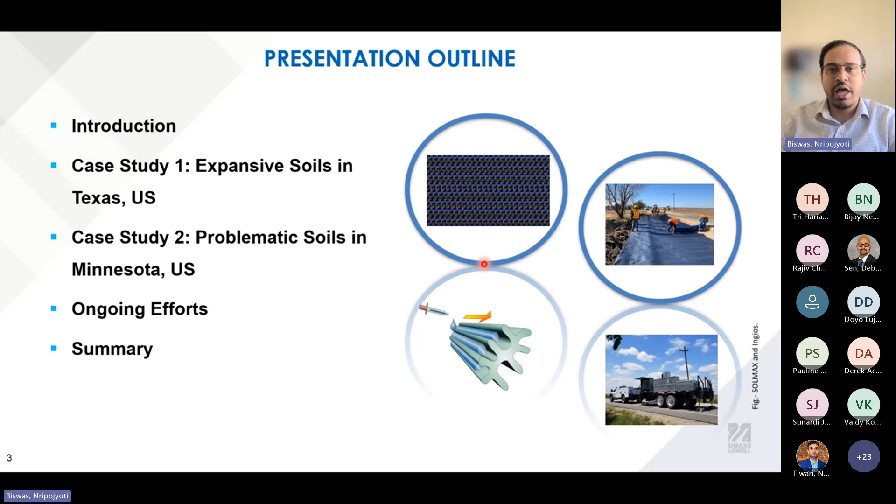So with that, this will be a short outline. I will just have a quick introduction, and then I will directly jump into two case studies. The first one is what we studied on use of these geotextiles in Texas, and the other one is how we used this geotextile in Minnesota. Both of these projects are related to pavement infrastructure because that was the principal focus. Then I will quickly show you some ongoing efforts, what we are still trying to do, and then I will conclude with some summary comments.

So to keep a quick background, a lot of this information is already available online, but I just wanted to introduce you. This Wicking Geotextile, anyone who has worked with geotextiles will understand the functions of geotextiles, essentially separation and reinforcement.

The principal advantage of this new wicking geotextile is that in addition to separation and reinforcement, it has a special fiber known as hydro or wicking fiber, which enhances lateral drainage. Traditional geotextiles also enhance drainage, but they mostly drain via gravitational flow. This geotextile, because of its microfibers, is able to facilitate flow by capillary suction.

This helps us use this geotextile for pavements, subgrades, or bases to remove more water, even when the suction is really low or really high, or essentially when it's more on the dry side of the optimum. Here you can see some of the schematics.

These are essentially 4DG, deep grooves, small grooves on the surface, and this helps to build the suction force to facilitate the capillary action. These are some other pictures, some of them from the website, so you can find a lot of those images there.

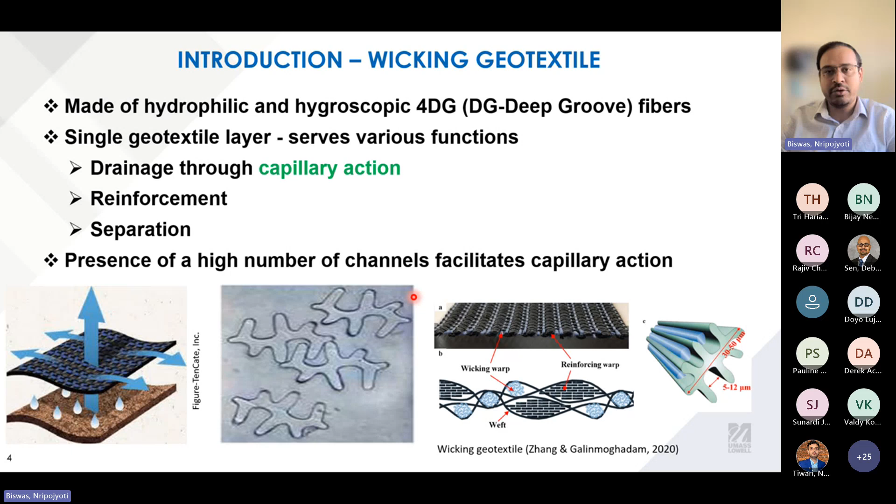With that, I will directly jump into my current focus, which is to show our efforts in Texas and Minnesota. The first one is our problems with expansive soils in Texas.

When we say Texas, the one principal problem we all talk about is expansive soils. The principal challenge in these soils, which causes pavement failure, is the swell and shrink behavior, resulting in differential heaving. Because of that behavior, it causes a lot of pavement damage, essentially cracking, rutting, and depression, affecting long-term pavement performance and increasing expenditure and maintenance cost.

These are some of the actual field images. On the right-hand side, this is one of the test sites, the region where our pavement test section was constructed. In this region, the pavements have lots of patchwork - this was a regular activity for the DOT to come and maintain the patches.

Because of this behavior of the soil - drying, cracking, and shrinking - there is constant damage to the pavement subgrade, which propagates to the top of the pavement. That's one of the challenges we wanted to address using this geotextile.

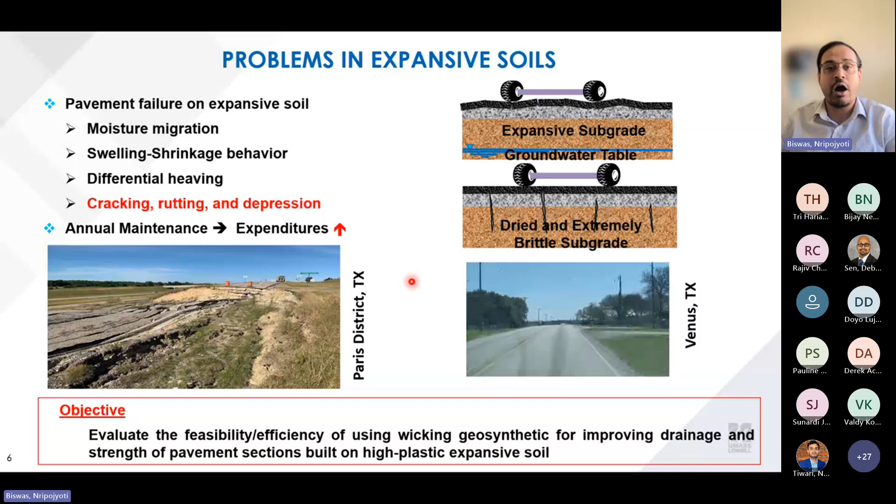So we started with a small laboratory test. These were very small tests where we just wanted to check whether this geotextile is able to drain the water. We did a control box as well as a reinforced box, then studied the drainability or transmissibility of the wicking geotextile.

We noted that in the absence of geotextiles, the volumetric moisture content is much higher. Once we put the geotextile in, the drainability or transmissibility increases, and in the given control condition, it can drain moisture in the lateral direction. That is something we are always trying to understand - whether it can drain moisture or not.

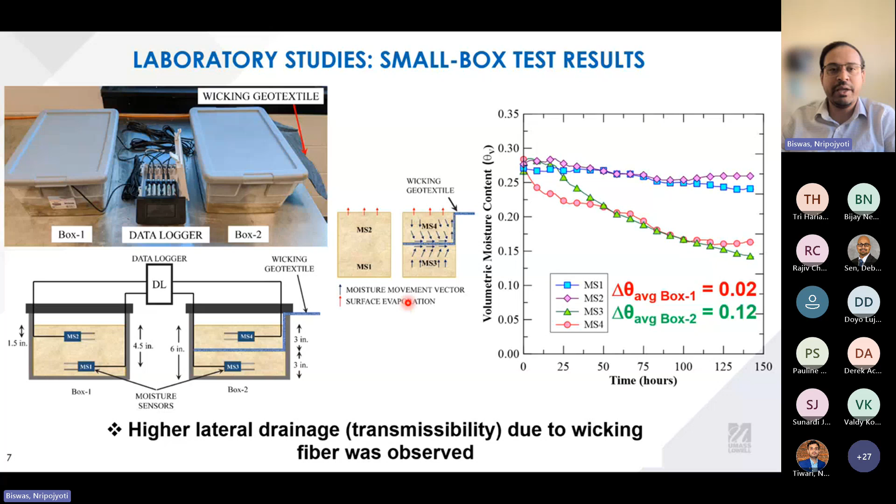After understanding this in a small scale laboratory test, we started to move into a bigger, large scale test. This was the large scale laboratory test that we did.

On the left-hand side, you can see this is a conceptual model, and on the right-hand side is the representation of the model that we did. It doesn't look exactly the same, but it had essentially the same function as what we initially assumed. So we created this box which had different sensors.

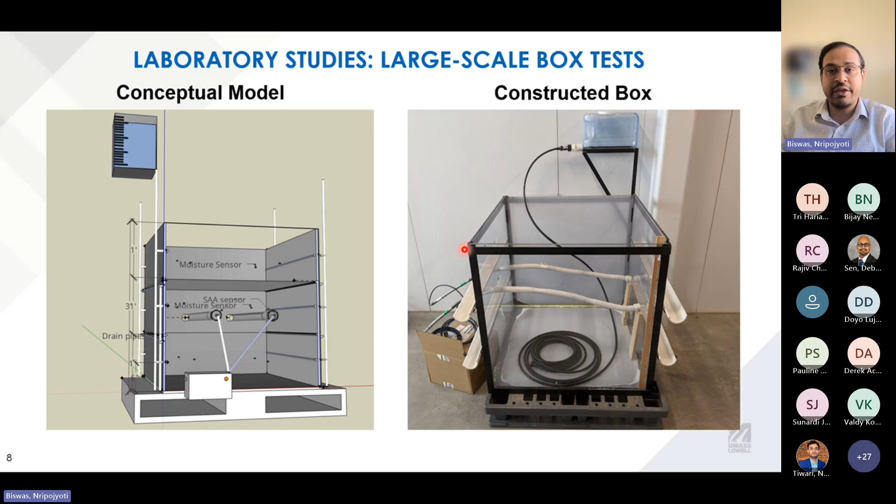Essentially, it has moisture sensors, shape and accelerometer or deformation sensors, and we can control the drainage in this box. This is the large scale test box that we did for understanding the behavior in a more controlled manner, and these are some of the steps.

So we constructed the box. We collected the soil from the local region, and we essentially constructed the box replicating the pavement sections. We had a subgrade of 18 inches, and then a base of approximately 15 inches or 12 inches. And then we constructed the pavement.

So we have different layers. You can see this is compacting the subgrade and then the layers, and then we have this sensor. These are just the locations where we install the sensors, and this is the final test box.

After constructing the sections, we also performed some quality checks. We use the dynamic cone penetrometer, which is Panda DCP, also known as variable energy DCP, to check the uniformity of the constructed sections.

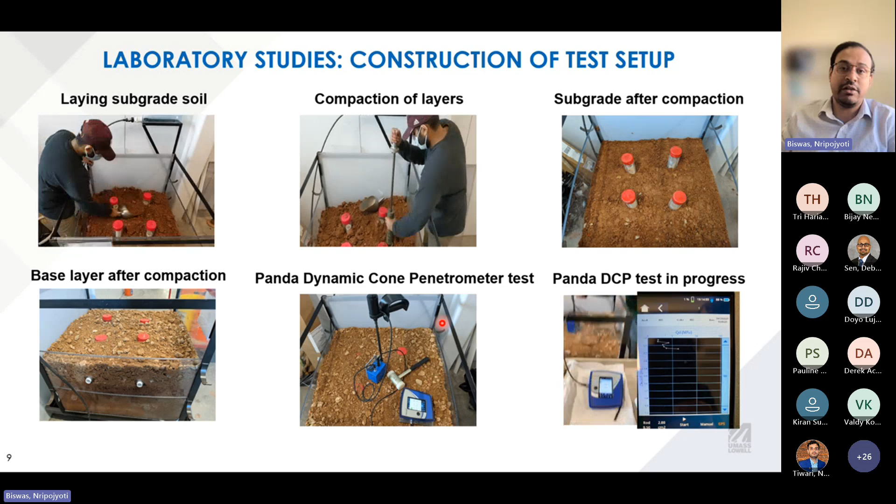For the reinforced section, we have to do this DCP test separately, once for the subgrade and once for the base, because the DCPs cannot penetrate through the geotextile, which would give wrong results. So that's what we did for the reinforced section.

This is just a representation of what we looked at or understood using this big box test. Again, just to see a result similar to the small test: the wicking fibers definitely helped in enhancing the drainage performance.

I didn't show the control test section results here, but it was able to drain more than the control sections. Another important thing we noted is that the base layer has higher drainage than the subgrade layer. The principal reason is that the geotextiles were essentially on the interface, and the drainage from the base layer is by both gravity as well as capillary suction.

Additionally, the grain size distribution of the base layers is much bigger than the wicking fiber. So the capillary suction generated in the wicking fibers is much higher than the pore size in the base materials, so it was able to drain the base material much more quickly compared to the subgrade.

In the subgrade layer, we saw it can drain up to 12 inches below the geotextile layer, which was substantial, because if you can drain the moisture until 12 inches below the subgrade, you are essentially increasing the stiffness of that layer.

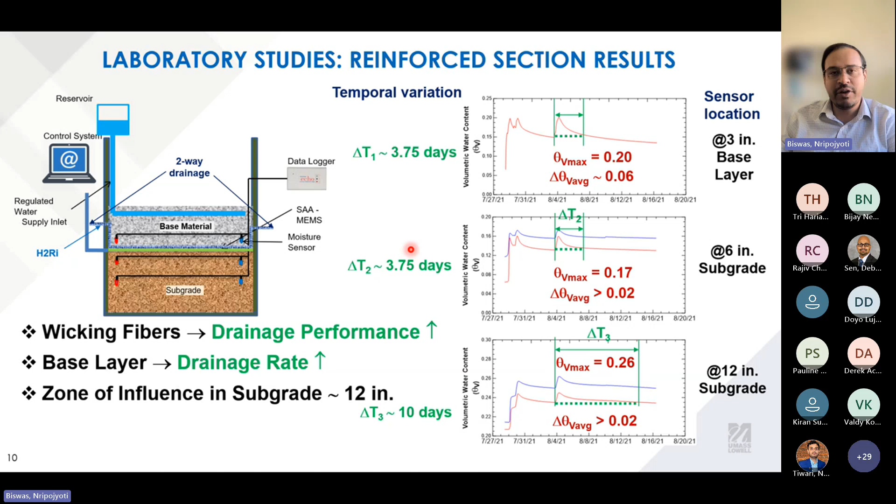Once we were confident that this works in the laboratory, we also parallelly constructed our field test section. So I will now go into what we did in the field. This is our field test and this is the project location.

This test section is located in Texas. On the left-hand side is a map clearly indicating the frequency of expansive soils in Texas, where the red regions are where you will encounter expansive soil everywhere. This is one of the principal challenges for the state DOT.

We selected one of those sites, Farm to Market Road 1807 in Central Texas, or Venus, Texas, and this is what you can see on the right. This was in 2017, when we were doing the reconnaissance of this region and how this pavement looks.

We decided with the DOT that we would use the eastbound lane as the test section, and the westbound lane would be used as the control section. The westbound lane has a different asphalt thickness, around 4 to 6 inches, but we decided to use thinner asphalt. After talking with the DOT, we thought that TxDOT has a huge pile of recycled material known as RAP, recycled asphalt pavement.

So anyone who is familiar with recycled material, recycled asphalt essentially obtained from the pavement surface, and the TxDOT Venus region, Johnson County, they had a large stockpile. So we thought we will use a marginal material as a base material, which is RAP, and we will use the geotextile, like H2Ri, to reinforce the RAP material. And at the same time, we will reduce the thickness of the asphalt layer. So we were trying to target multiple things through this test section.

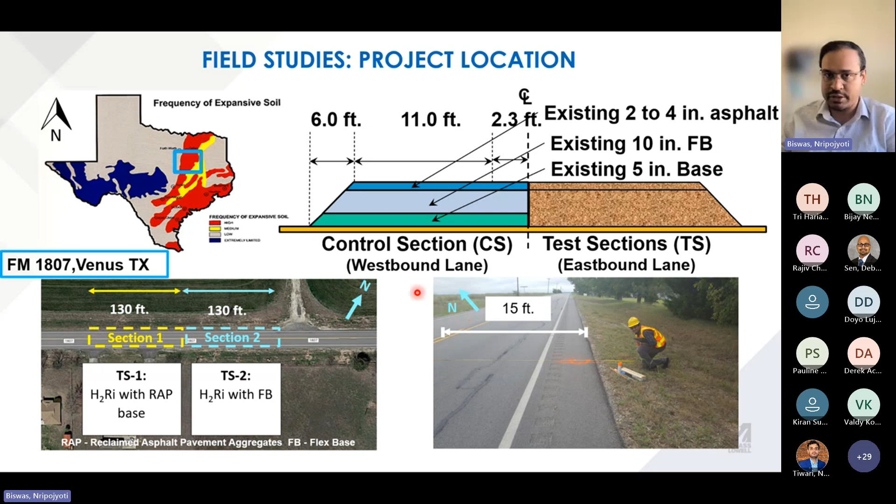And this is the outline, or the schematic of the test section. So this was what we initially thought we will do. We will have this base material, and on the left hand side you can see approximately 15 inches of RAP, or reclaimed asphalt pavement material base, and 2 inches of asphalt concrete. And we did install a number of sensors.

So we had SAA, shape array accelerometer sensors, which are the deformation sensors. And then we had earth pressure cells. And in this figure you are not able to see, but we were able to install at least 9 moisture sensors to monitor the moisture migration within the pavement layers.

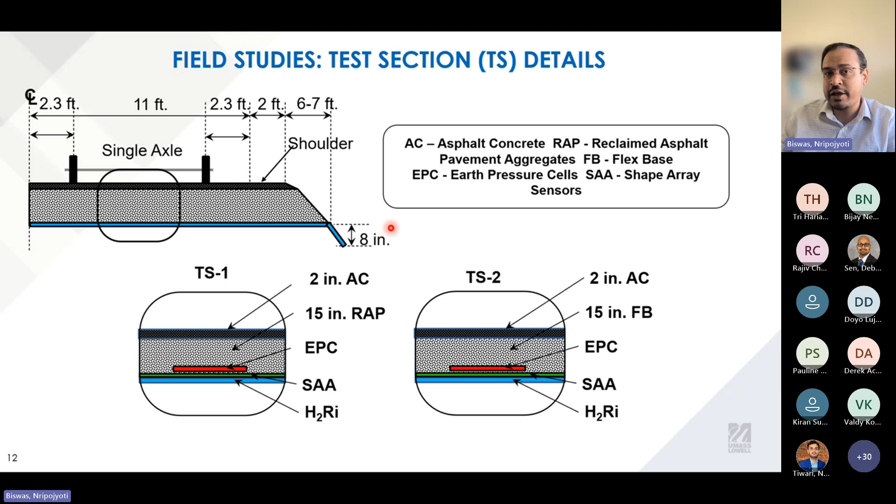One of the challenges with this wicking geotextile was we needed to ensure the geotextile was exposed to the surface, because that is how it will absorb, or create the capillary suction region. But during construction, it never happens what you plan. So during construction, we had to cover this exposed region with some RAP material, because TxDOT was concerned that if we leave it exposed, someone might damage the geotextile. So in the real construction, we had to cover these exposed regions with RAP material. But surprisingly, that didn't affect our performance a lot, and we still got the desirable behavior.

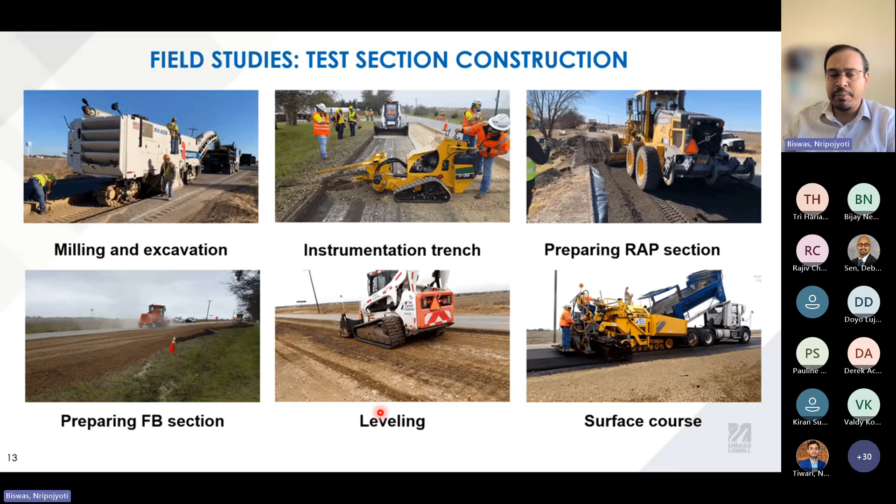And then this is some of the construction stages that we did. We had the initial milling and excavation, and then we did the instrumentation trenches for putting in the deformation sensors. Then this is the construction you can see on the right, the construction of the RAP sections and preparing of the flex base section. And then we leveled it. This final construction is basically done after 7 days. So for 7 days after this leveling, we left the pavement open for traffic, and then we came back and did the surface course.

After that, we also performed different performance monitoring studies. One study we did was the automated plate load test with the support of Ingios Geotechnics. This is a dynamic plate load test, very similar to the resilient modulus, the AASHTO T307 studies that we do in the laboratory, but on a larger scale. It's a little different from the FWD because it applies rapid load, or an increasing number of load cycles, and monitors the deformation. So this gives you the field resilient moduli, and we performed this study on this constructed test section.

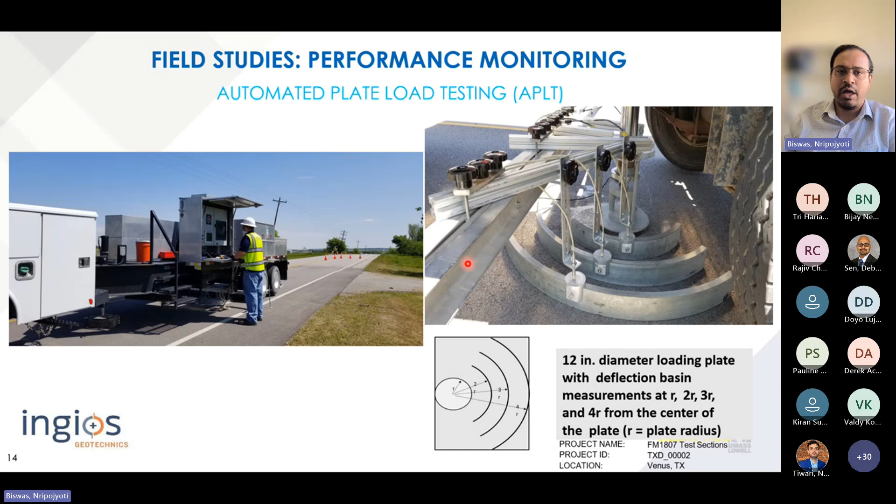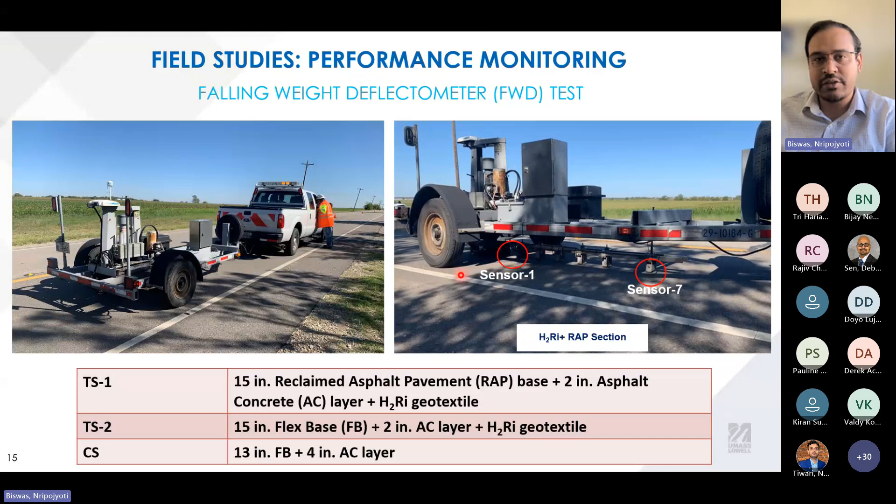We also did the traditional falling weight deflectometer test. This is just one test shown, but over the next 4 years we did falling weight deflectometer tests over different seasons to understand the behavior of the pavement layers at different times. You can see this has a weight hammer of 90 pounds, and 7 sensors that record the deformations. It essentially works on the principles of linear elastic theory, and helps us predict the performance of the surface layer, base layer, as well as the subgrade layer. So we were able to perform these tests for all the test as well as the control sections.

Now, to quickly give you some results that we have obtained in this work. So what we saw is like in the test section, which is the reinforced section with the wicking geotextile, you can see this bottom one, this is the green and the red one, those are the reinforced section, and the control section was the other side, which is having no geotextile.

We saw the moisture in the wicking geotextile was much lower, and it peaked at the period where there was rainfall, and it was able to drain the moisture rapidly after the rainfall, whereas in the control section it stayed persistently high.

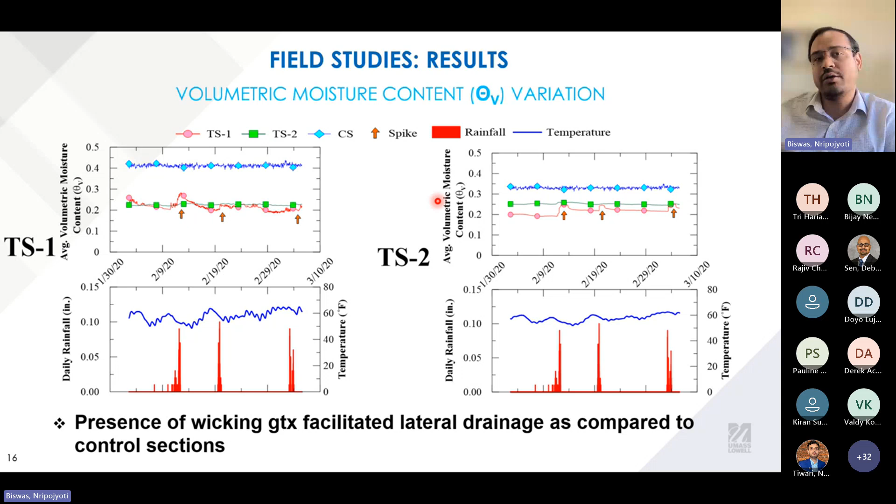Another thing we noted was the moisture in the RAP, reclaimed asphalt pavement layer section, was generally higher than the one in the flex base section. The reason is because the RAP materials have much finer particles as compared to the flex base, and because of those finer particles, the drainability of the RAP layers is much lower. So that was one of the reasons why this RAP material was retaining more moisture than the flex base material. But in general, both sections were retaining lower moisture as compared to the control section.

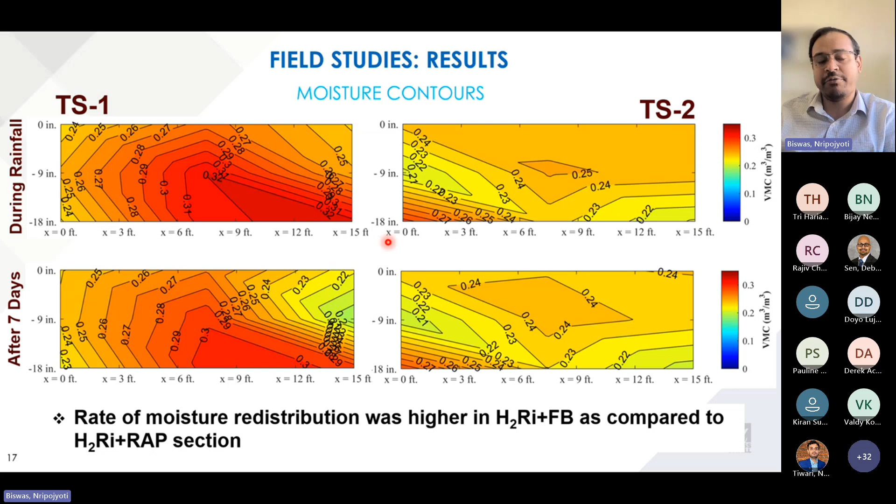This just represents the moisture contour. So we were able to see the moisture reduces near the edges, mostly in the wicking geotextile region, and that is essentially showing it is draining in the lateral direction, as we were expecting. We also plotted some of the moisture contours, and we are happy with the performance.

But once we went back and checked the various literature, we saw that the principal problem with RAP material is that it has lateral spreading, so it's not resistant to lateral spreading. But if you just test the resilient moduli for the RAP material, it has higher resilient moduli individually. Because of those asphalt particles sticking and holding the materials together, it generates higher MR. So that's why the RAP materials essentially generated higher resilient moduli as compared to the traditional flex base materials for this case also.

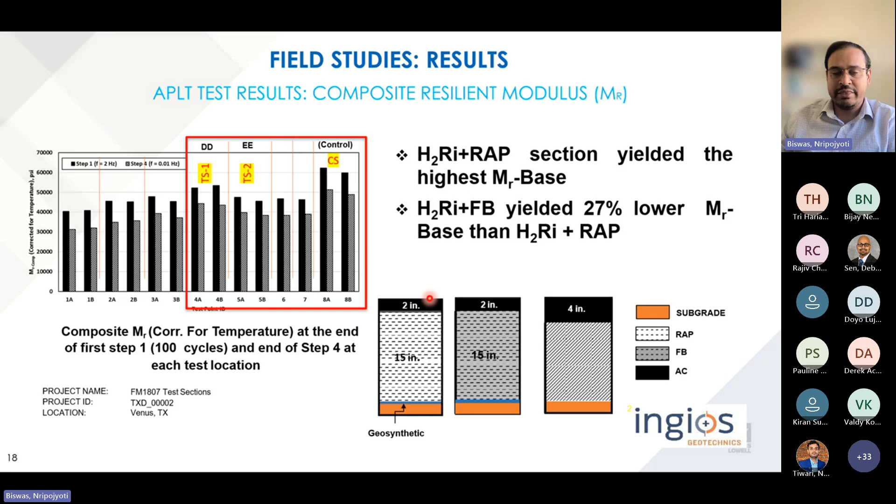And then quickly showing you what we saw as FWD test results. What we generated from this test was essentially back-calculated moduli and rut life. Again, this echoed the same behavior that we were seeing from the APLT. The RAP layer was showing higher rut life, or higher remaining life, and higher moduli value as compared to the traditional flex base.

From FWD, it is always difficult to exactly predict the subgrade modulus and the base modulus, but what we did was for the RAP material, we back-calculated the base moduli to be 45 KSI, whereas for test section 2, it was almost 25 KSI.

Interestingly, if you look at the control section, which has a thicker asphalt layer, the performance of the base and subgrade moduli was almost similar, which means the geotextiles along with the drainage were able to replicate the performance of a thicker asphalt pavement layer.

So this essentially helps us verify that if we are able to replace that thick asphalt with a base material of marginal quality, and then reinforce it with some kind of geosynthetic, then we can have a similar design life, or even better design life. So this was one of the major learnings that we understood from the studies in Texas.

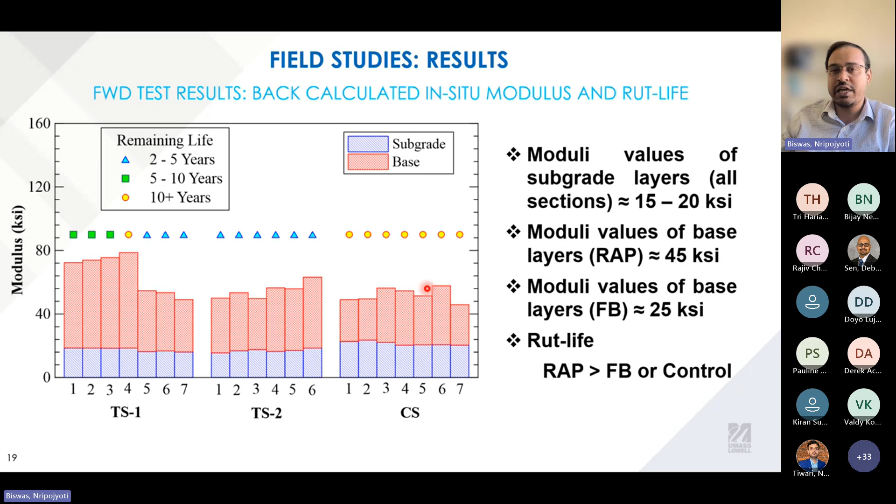So this is what we did in Texas, and once we were confident in this, we extended our work to a different region. We worked closely with Michigan State and Minnesota MnROAD, and tried to study the behavior of these wicking geotextiles in that region. Previously a few people had studied this work in Alaska, but the challenges in Minnesota were different because it's a different region than Alaska, and we tried to address that challenge through our study.

So this is the general background why we needed to do that work. If you see on the bottom, I will start here. So Minnesota is somewhere located here.

This region is in the wet freeze region, in the north of the American region. The challenges in the wet freeze region are that it can develop longitudinal frost cracks, and local regions of frost boils. Another challenge is that during the winter, water enters into the base and subgrade.

And the ice expands. In the spring, when the water thaws away, it is at its weakest, making the subgrade really weak. So that essentially damages the pavements in the spring region, or when the thaw is happening.

So our goal here was these three conditions which cause frost heave: freezing temperature, presence of frost susceptible soil, and water supply. Our goal was to cut down the water supply to the layers, or potentially remove the water supply, reduce the water supply, so that will essentially help in improving the pavement performance.

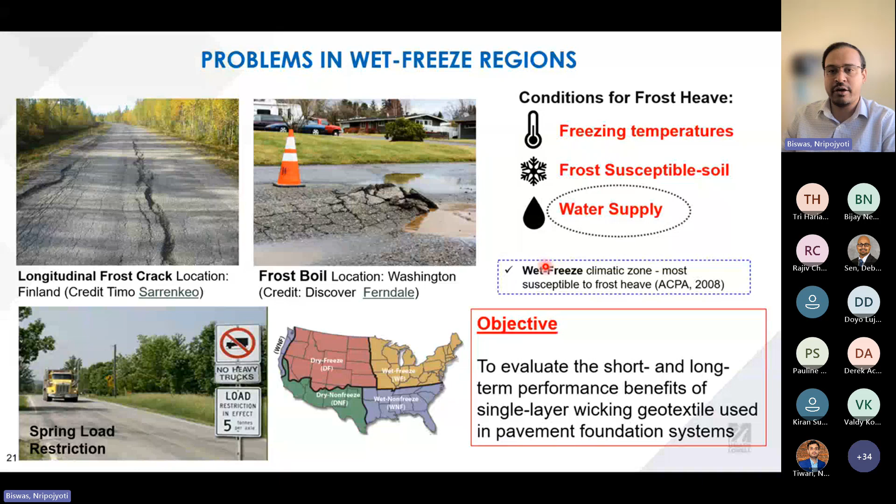So with that, we set up an objective to evaluate the short term and long term benefits of a wicking geotextile used in pavement foundation for this Minnesota region. Before going to the field, we did laboratory studies. In this, we did two types of laboratory studies: one was an accelerated laboratory loading test, and the other was the accelerated laboratory drainage test.

The loading test was performed with Michigan State University and Ingios in their laboratory. You can see this is the schematic of the test section constructed in laboratory. On the left-hand side, this is the control section, and on the right-hand side, this is the wicking geotextile section. Then this is the plan view.

These test boxes had different kinds of sensors: moisture sensors, thermocouples, and at the top there is a loading plate. This loading plate was used to replicate the field test, field repeated loading, or to calculate the stresses at different temperature, or when there is freezing happening in the base, subbase, or subgrade layer, and how this repeated load is going to affect the moduli.

You can see there are PVC pipes at the bottom, and some granular layer. The water was pushed from the PVC pipes from the bottom. In this particular study, we approached it through an open system. We ensured it is covered with some kind of foam board on every side so that freezing doesn't occur from the side.

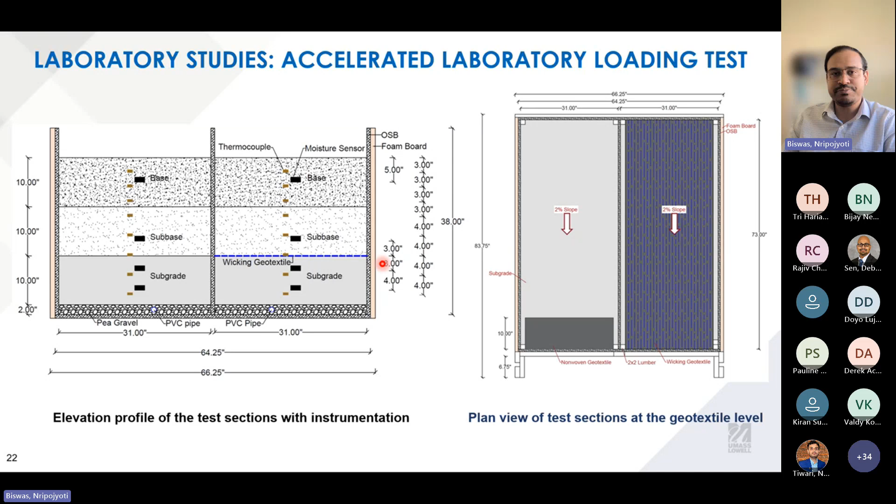This is the top view of the geotextiles: this is the control section, and this is the wicking geotextile section. These are the different steps of the construction. You can see the layers being compacted, then a 2% slope, and the installation of the geotextile and non-woven geotextile, and the control and the slope angle.

On the right hand side, you can see this is the final test setup. You can see the water tank, which is pushing water from the lower side. The water we were concerned with is moving only through capillary action. We are trying to insulate it from every direction using wood and foam boards. Here we have the small loading frame, and finally in the front you can see the two boxes. The wicking geotextile is extended into these boxes, which was used to collect the water that is coming in.

I think we also extended this to some kind of rainfall studies, but I have not included that in this presentation.

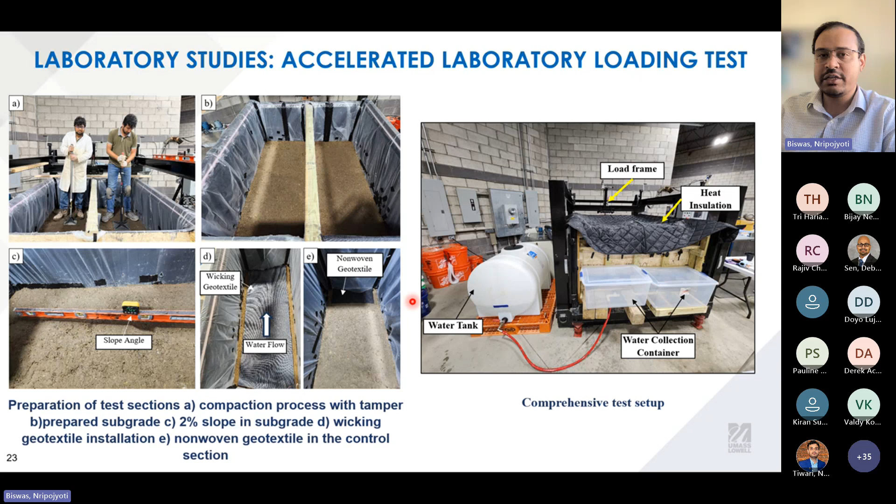But mostly, I just wanted to show how the freezing affected the performance.

The next study we did in the laboratory was again the accelerated laboratory drainage test, performed at Texas A&M. In this one, we again have two test sections: one for the control, and another for the reinforced section.

We again tried to insulate this section with geofoams on all sides because we wanted to ensure top-down freezing. The advantage we had was a big environmental chamber that we could set at minus 18 degrees Celsius, and we could push this entire box into it. This is approximately a 3 feet by 3 feet box constructed using three layers: subgrade, subbase, and base layers. We had a water supply, and we were able to push this entire setup into that environmental chamber.

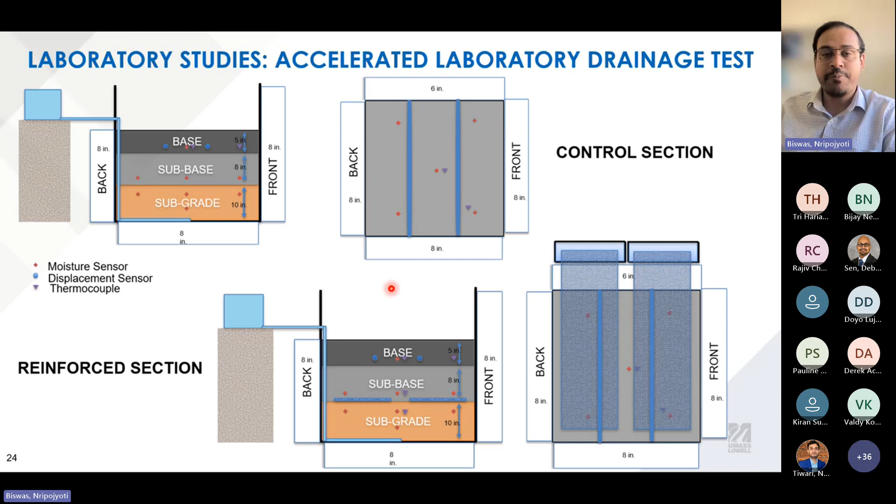This is again for the control. And on the reinforced side, you can see we have two reinforcement strips, and we are able to collect the moisture coming out from the reinforced section or the geotextiles in a separate container. This shows the different steps of construction.

We had different sensors installed in this box as well, like deformation sensors, shape array sensors, moisture sensors, and thermocouples. On the right hand side, these are the two final test setups. The top one is the control section without geotextile, and the bottom one is the one with geotextile.

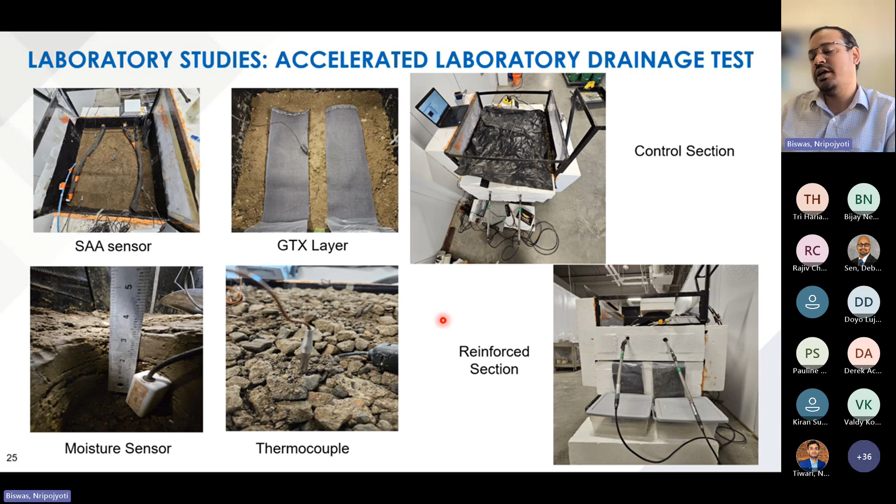This is a 3 feet by 3 feet box. If you can see the small white structures on the left hand side, those are actually the big environmental chambers, and we were able to push this entire test setup into an environmental chamber to understand the drainage behavior during freezing or thawing. So these are the two laboratory tests that we did for this new region study.

I just wanted to quickly show you some results, but there are a lot more results. I just wanted to highlight the main ones.

The first one, on the left hand side, is about moisture in the subgrade, from the accelerated loading test performed with the help of Ingios and Michigan State. We saw that compared to the wicking section, the control section or subgrade had higher moisture, mostly during thawing, because in the open system during freezing, the ice lenses expand and create more voids.

Since we are continuously supplying water even during the test, that pushes more water into the system, causing more drainage of water during thawing. In the case of wicking geotextile, that material is able to drain excess water even during the freezing period, so it didn't show as much increase in water content compared to the control subgrade.

Another interesting thing we saw is that in the case of the wicking geotextile, freezing happened more quickly compared to the control. The principal reason we understand is that there are some interface gaps or interface layers, and freezing was happening through that. So the frost penetration in the wicking geotextile sections was much higher compared to the control section.

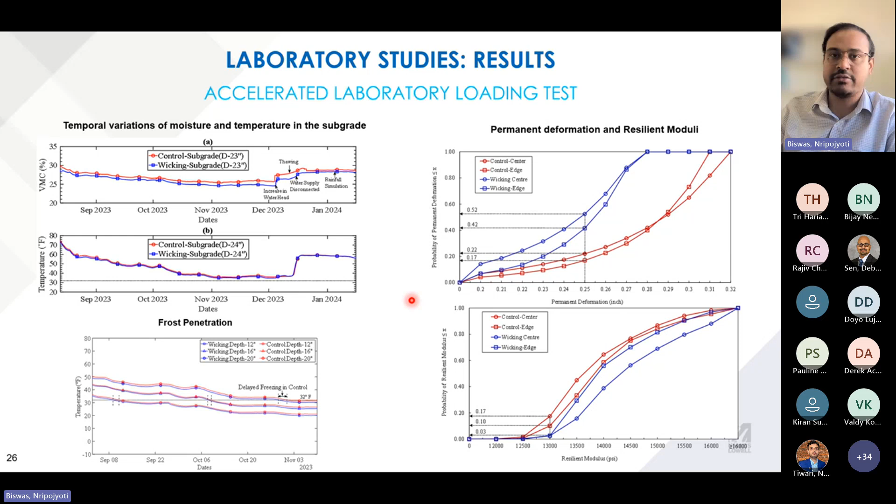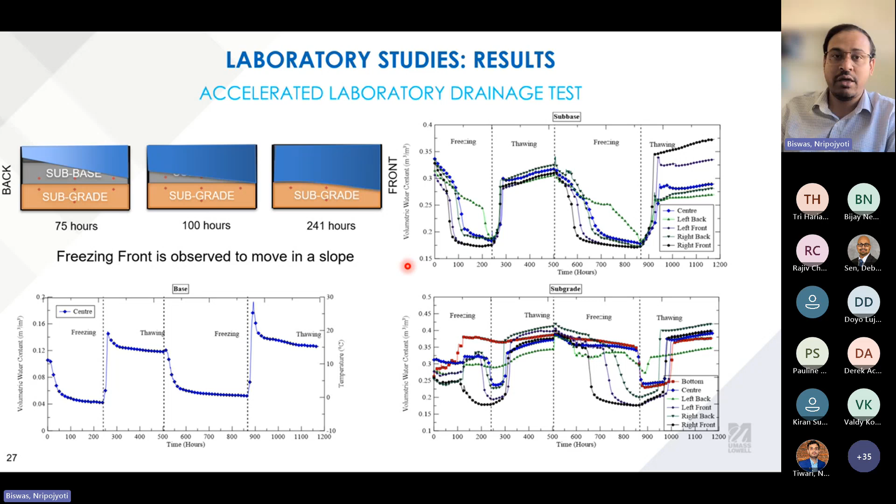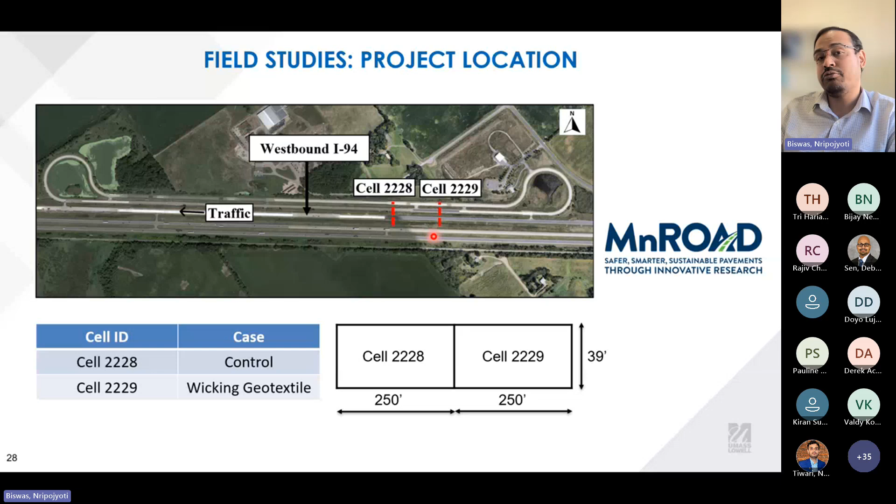Parallelly, since we were thinking of going to actual field studies, this project did have a field study. It was performed in Minnesota with the help of MnROAD, and it was constructed on westbound I-94. They have different test cells; our test cell was cell 2228 and 2229, on a westbound lane, constructed in 2022. So we have one control section and one reinforced section there.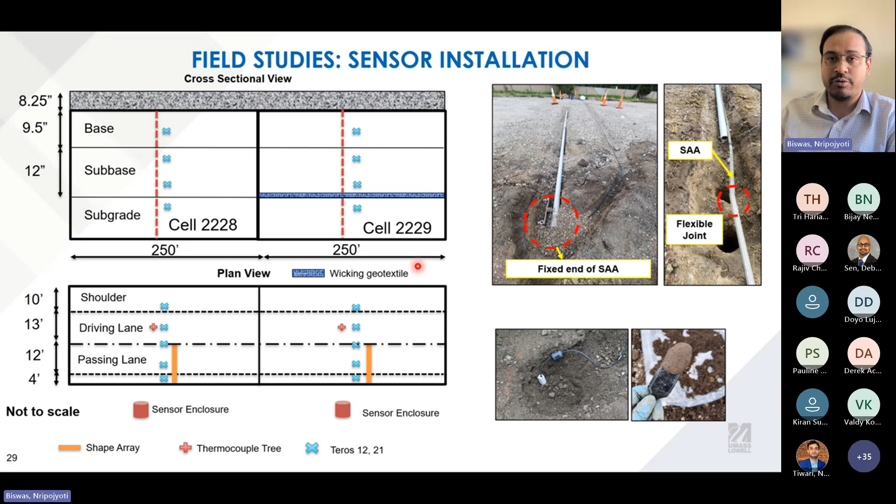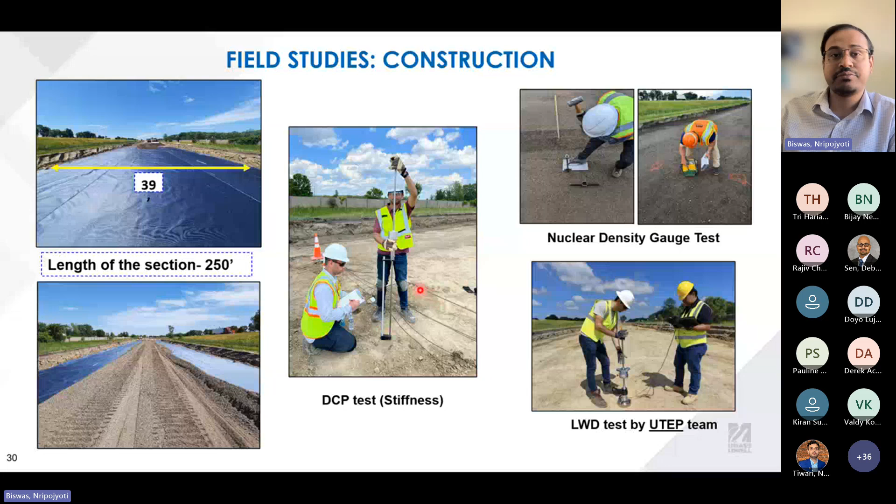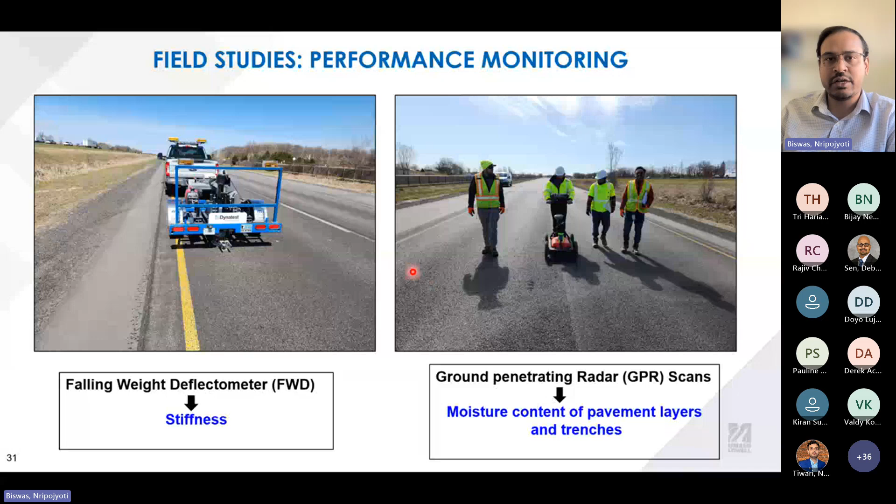By that, we ensured this geotextile is not exposed, and it also ensures performance. We also did multiple control tests, like the DCP test and nuclear density gauges, and we were able to perform LWD tests with the help of University of Texas at El Paso. We are also doing ongoing work, essentially falling weight deflectometer as well as GPR scans. This is still an active project, and we are still getting results and trying to analyze this performance.

Just to give a quick overview of the results, this is the results from the moisture content. I will just focus on the subbase moisture content as of now. What we see is that in the control section, the drainage was slower compared to the reinforced section. In the wicking geotextile section, the drainage was quite rapid, because that's one of the advantages of the wicking geotextile. In this one I have not shown it, because this is a bit of an old result, but in general, during construction of the control section there was no rainfall, whereas during construction of the reinforced section there was rainfall.

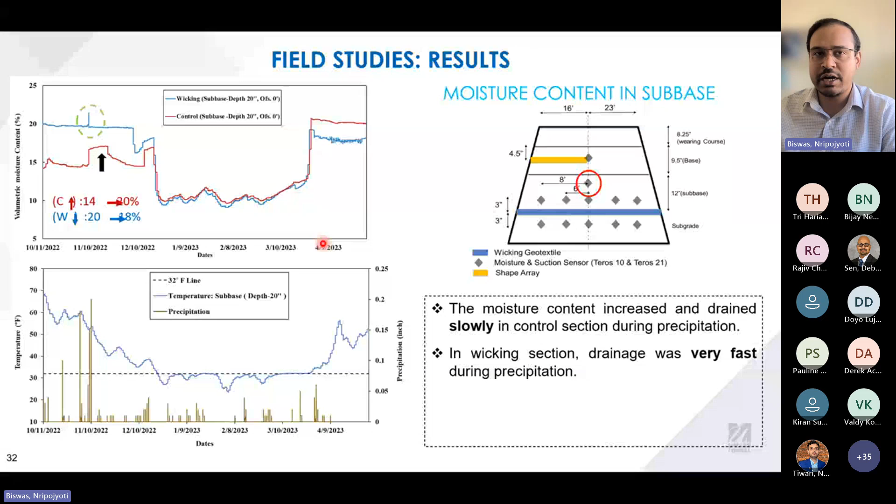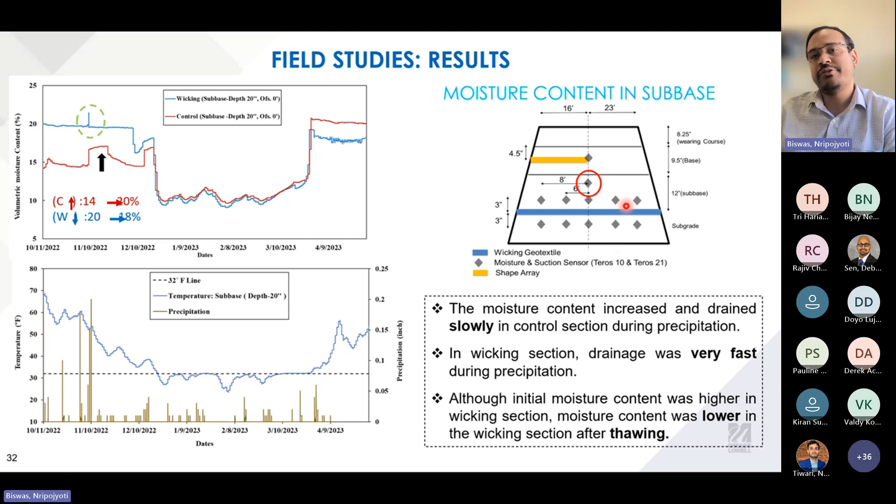That's why the subbase was already at higher moisture content for the wicking geotextile, which is evident here. Over the longer period, because of the geotextile, the subbase moisture is continuously going down. The wicking geotextile is continuously draining the moisture, and it has now gone down below the base, below the control section. That's definitely one of the advantages we're seeing because of the geotextile. This is just one representative sample, but it's a general trend for both the center and the edge of the pavements.

Now some analysis from the matric potential of the suction sensors. One thing we noted is the matric potential jumped during sub-freezing conditions. As freezing started, the temperature went down, the material or the subbase froze, and the capillary suction went significantly high. That resulted in a maximum increase of the matric potential.

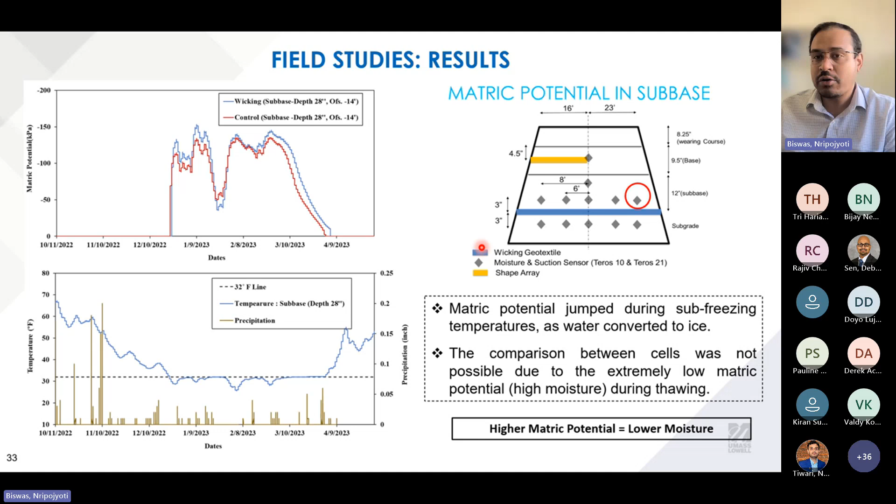During the thawing period, the comparison was difficult because everything doesn't go as planned in field construction. The comparison between the cells was not possible because the matric potential sensor was not recording data during the thawing season, since it was really saturated and the potential sensor stopped recording. But during the freezing season, it really showed the formation of ice, or the beginning of ice formation, and how it performed.

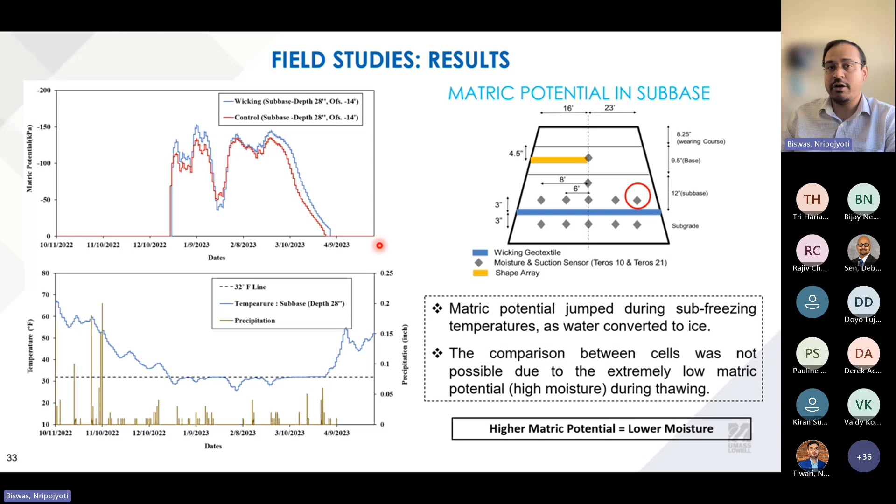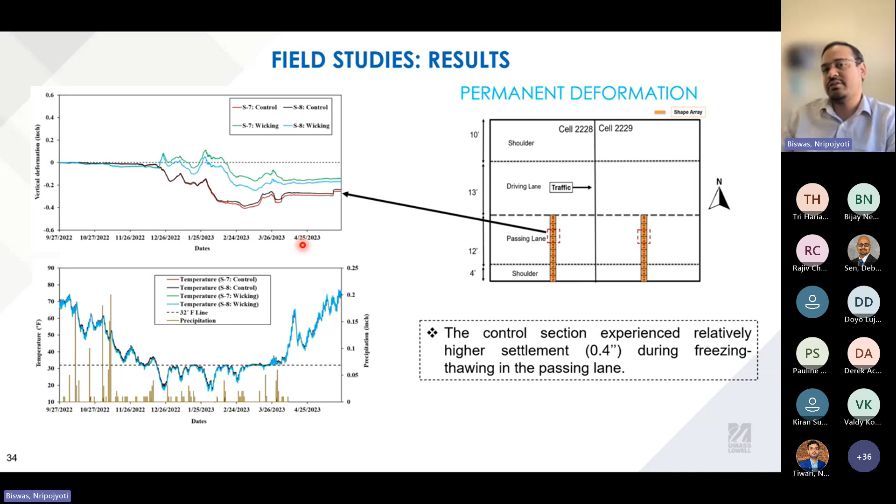Finally, the permanent deformation using the shape array. In this one, we wanted to show the deformation below the pavement, in the wheel path. As compared to the control section, which has much higher deformation, compared to the test section or reinforced section. This shows, both from the reinforcement action as well as the drainage action, the reinforced sections have much better performance compared to the control section.

With that, I'll quickly show some ongoing efforts, because we're still learning a lot on this. What we're trying to do right now is see how this geotextile is effective on slopes. This work is ongoing by one of my colleagues, Avinash, who is working on this right now, and I appreciate him sharing this information.

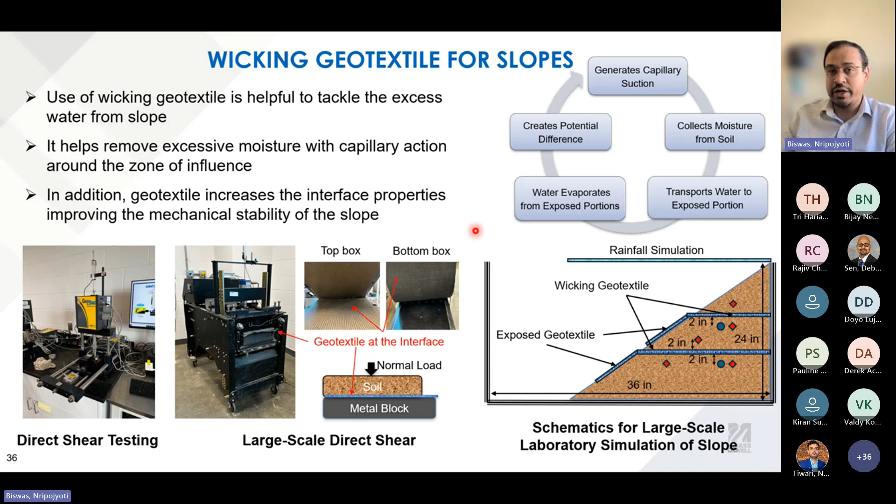He's trying to see how this geotextile can help reinforce the slope, because geotextiles have been used for reinforcement before, but those are traditional. This geotextile has the added advantage of moisture removal. He's doing lots of direct shear testing and interface testing. This is the schematic of a large box we're trying to construct. We will do a full scale test using this geotextile, understanding how it helps improve slope stability of pavements under wetting and drying, as well as freezing and thawing.

Another thing we really wanted to focus on is that most geotextile applications are often challenged by cost. So we're trying to address that by performing some life cycle analysis. This is some preliminary data or studies we tried earlier, based on the cradle-to-gate and transportation to site approach. This is still ongoing; there's lots of data we're still trying to gather. We're trying to use OpenLCA for performing this analysis. This is still ongoing work, and I believe we'll have more data to share next year or so.

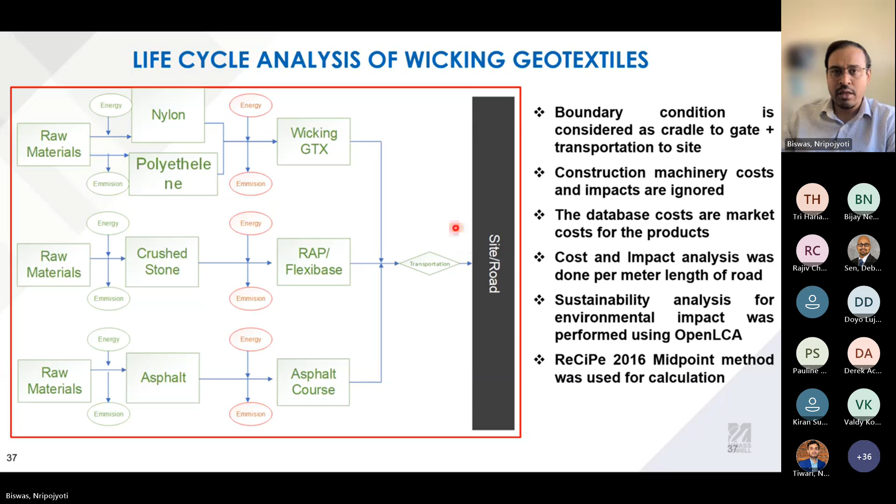So with that, I'll try to summarize and close this discussion. What I've learned so far, as part of this project over the past 6 to 7 years, is that this geotextile was found to be effective in improving performance, both in Texas and currently in Minnesota, where we're still monitoring. The advantages of this geotextile are that in addition to reinforcement and separation, it can also ensure lateral drainage. We verified some of these things in the laboratory, and we're doing long-term monitoring, still trying to monitor the Texas pavements, and we're doing a lot of monitoring at the Minnesota I-94 site.

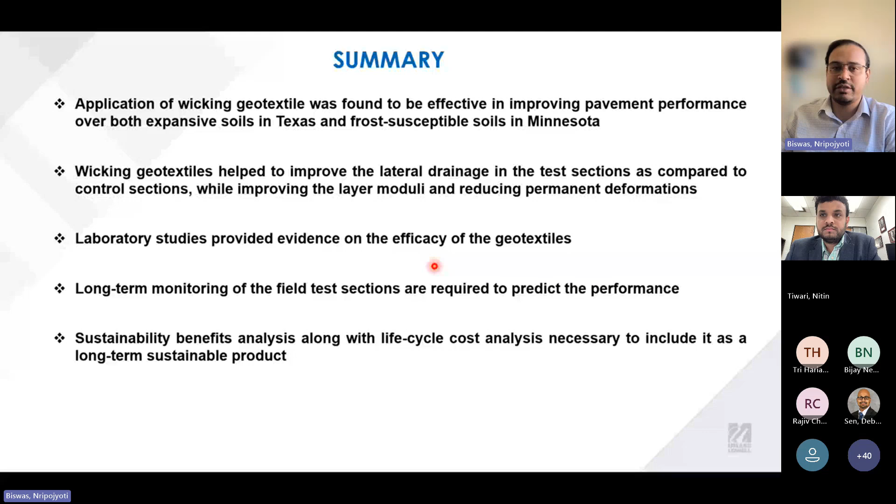And definitely one of the final things is we need to have some sustainability benefit analysis or life cycle analysis, even before we can show it as a sustainable product in the future. So with that, I would like to thank everyone for their time attending the presentation, and I would be happy to answer a few questions.